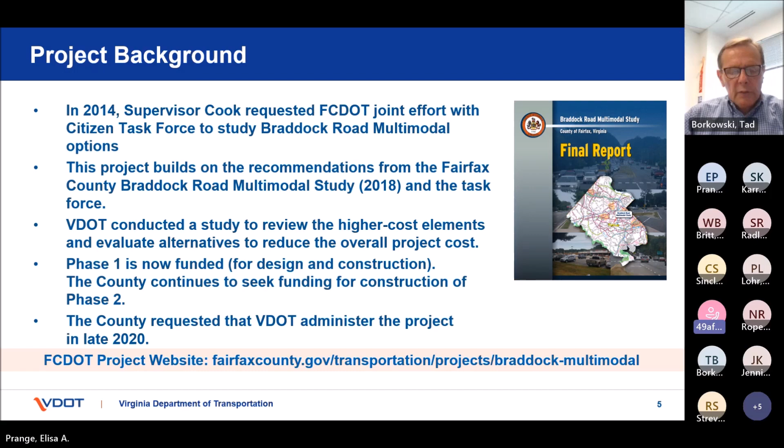After several unsuccessful attempts at securing funding, the project was split into two phases to increase chances of securing some funding to advance the project. In 2020, as part of a VDOT pilot project, proposed changes were included with the phase one Smart Scale application to reduce costs. Those proposed changes were presented to the community on August 3rd, 2020. Later in 2020, Fairfax County and VDOT coordinated on the best implementation approach, and VDOT agreed to take on development of the project on behalf of the county. In May 2021, as Andy said, this approach was successful and Smart Scale funding was awarded to phase one. The county continues to seek funding for phase two in partnership with VDOT. And now I would turn the presentation over to VDOT project manager, Calvin Britt.

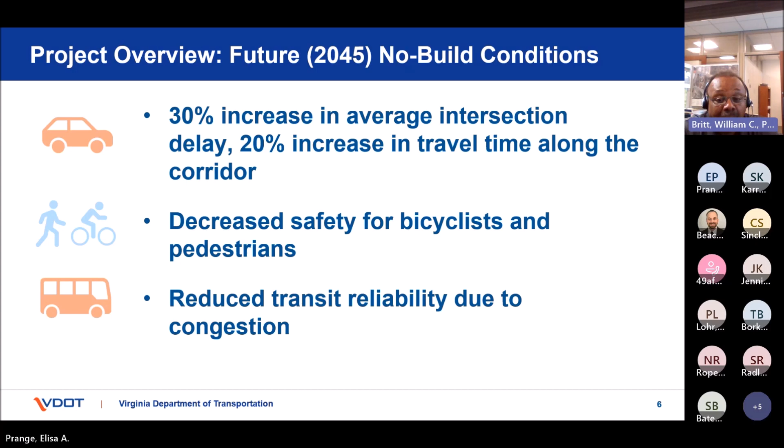Thank you, Tad. When looking at the future no-build conditions for the corridor in 2045, it is projected to have a 30% increase in average intersection delay and a 20% increase in travel times throughout the corridor when compared to the existing condition. This increased congestion may lead to decreased safety for pedestrians and cyclists, as well as reduced transit reliability without the project being constructed. Next slide, please.

VDOT is excited to be here to continue the development of the design for the Braddock Road Multimodal Improvement Project. Our work builds on the county work with a focus on implementing multimodal improvements along the Braddock Road corridor. VDOT has continued to collaborate with the county throughout the design process, and all the information, designs, and analysis that will be shared with you tonight were developed with these 5 overarching project goals. Number 1, improving connections and access on both sides of Braddock Road. 2, improving the comfort and safety of facilities for bicycles and pedestrians throughout the corridor. 3, improving transit accessibility. 4, maintaining and improving vehicle travel times throughout the corridor. And number 5, improving safety for vehicles by implementing access management at select intersections. Next slide, please.

Typical section between intersections. While there are design adjustments at specific locations, the project's typical cross-section includes a new bi-directional 10-foot shared use path, offset 10 feet from the edge of the travel lane with an 8-foot buffer between the shared use path and the face of curb, a 2-foot gutter pan on each side of Braddock Road, and the retention of the existing 3 vehicle lanes in each direction. This is in line with the recommendation resulting from the county study that Tad described.

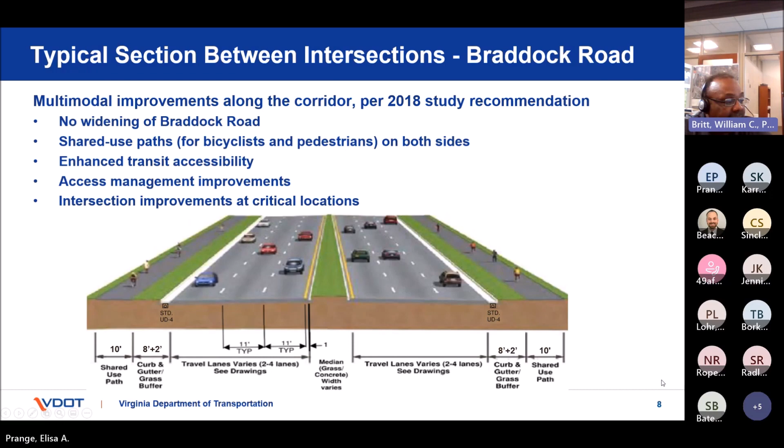Thanks, Calvin. One of the questions that has come up in multiple public forums is, why is a new shared use path needed in the sections where there is already a trail that runs parallel to Braddock Road? In response to this question, the project team reviewed the entire Braddock Road corridor to determine if there are portions of the existing trails that are viable to retain. Sections of the existing trail have significant challenges that make them unsuitable for use as a shared use path.

Some sections of the existing trail are set far back from the roadway and have limited visibility to the public, which may feel uncomfortable for some users. The proposed shared use path addresses key issues with the existing trails. The path will be 10 feet wide, which is ample for all users to comfortably pass one another. Grades will meet the ADA requirements by providing a facility that is usable by everyone, including those with disabilities.

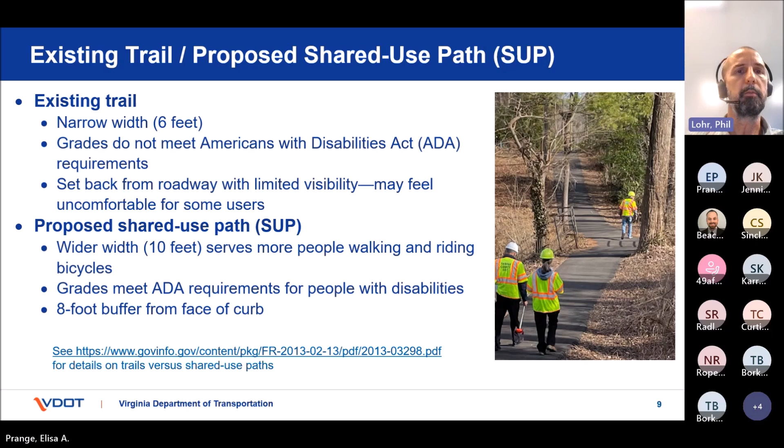So the results of our study are as follows. In the areas where the trail grades are under 5% and the trails are close to Braddock Road, it will be possible to widen or reconstruct them and incorporate them into the shared use paths. However, it will not be possible to preserve all the trees in those areas. These sections constitute approximately 27% of the existing trails.

Approximately 35% of the existing trails are considered to be offset too far, varying from 40 to 75 feet from Braddock Road, to function as shared use paths. The remaining 38% of the existing trails have grades that are too steep to be usable as shared use paths.

One of the topics we have explored in depth is how best to meet the project's stormwater management requirements. These requirements are described in the Code of Virginia, and compliance with the regulations is overseen by the Virginia Department of Environmental Quality.

The county, VDOT, and the design team have collaborated on a revised SWM strategy that consolidates many of the linear best management practices, or BMPs, that is, stormwater management treatment facilities, shown previously into 10 facilities in lieu of the 21 presented in the earlier design. Using fewer, albeit larger, facilities will meet the state regulations, preserve more trees, and not burden VDOT with expensive long-term maintenance obligations. This graphic illustrates one location where we were able to implement this strategy.

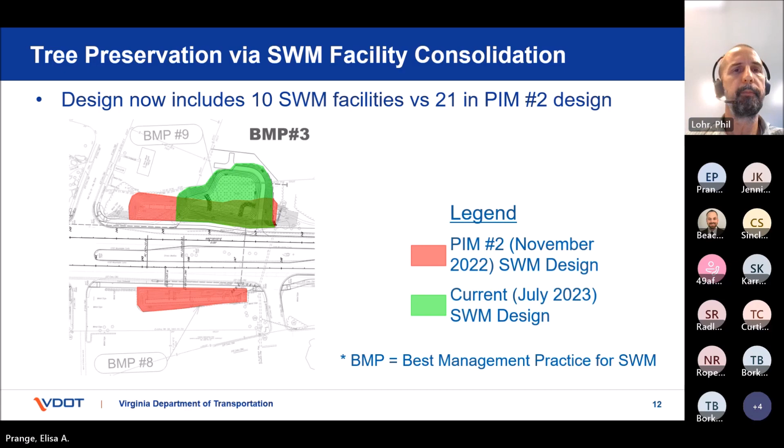The strategy we have explored is the use of retaining walls to preserve more trees, especially in residential areas, where approximately 75% of the walls are proposed. Some areas along Braddock Road require significant amounts of cut in order to construct the shared use path adjacent to the road, while in other areas the adjacent ground is lower than the road and requires substantial fill to accommodate the path.

Mechanically stabilized earth, abbreviated as MSE, retaining walls tend to be the lowest cost to construct. But the key feature of MSE walls are straps that extend behind the face of the wall to provide the structural integrity. This requires substantial excavation behind a cut section wall, and so MSE walls are not suitable here where the goal is to preserve trees. There are other construction methods that can be used to minimize the impacts behind a retaining wall. These include the following:

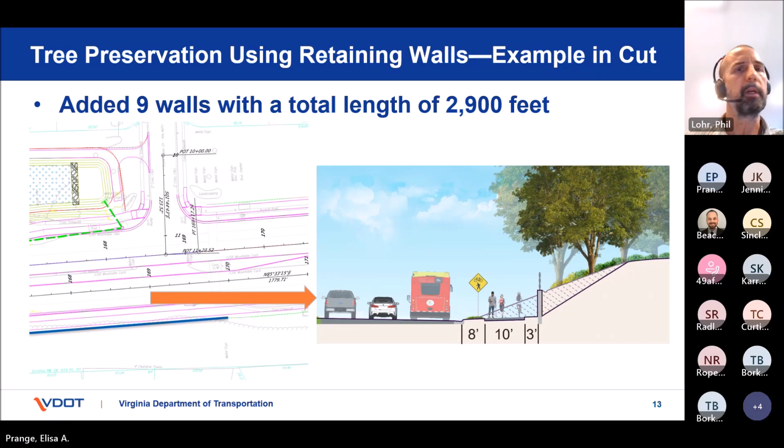This is an example of a location between Inverchapel Road and Queensberry Avenue where we have determined that adding a fill section retaining wall will help us preserve more trees. In this case, the wall will save approximately 20 feet of impacts going down the slope away from the road. Along the length of the corridor, we have identified 4 locations totaling 1,200 linear feet where it will be useful to include similar fill section retaining walls in order to preserve more trees. For the fill section walls, MSE walls may be viable, but again, the type of wall will be designed once the geotechnical investigation is complete. Slide, please.

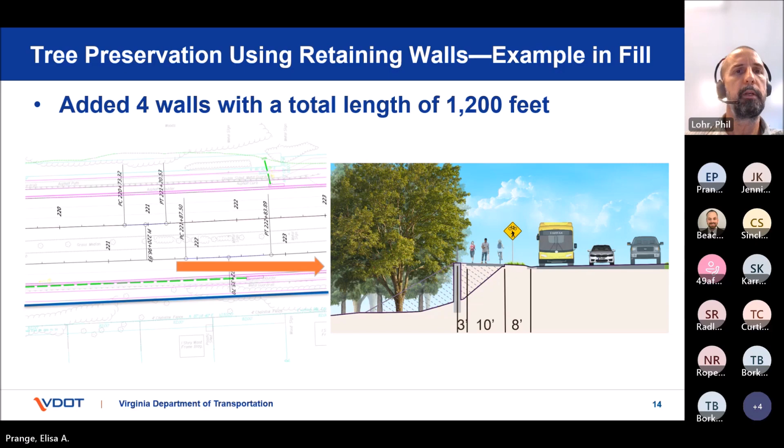So here we are showing the overall benefits accrued by consolidating stormwater management facilities and adding retaining walls. Within existing VDOT right-of-way, tree preservation is increased by almost 70%, that is, from 28 to 47%. Where right-of-way or easement acquisition is necessary, the additional property is almost entirely needed to accommodate project grading, which means that within the limits of disturbance, the percentage of tree removal is a little higher. But even from this perspective, tree preservation is improved by about 70%. That is, from 24 to 41%. The percentages shown here are for both phases of the project. The example at the bottom of the slide would be part of phase 1.

On the left, notice the large areas of red, that is, tree removal, driven largely by the linear stormwater management facilities shown in bright blue on both sides of Braddock Road. On the right, these particular SWM facilities have been consolidated elsewhere on the project, and retaining walls have been added on both sides of Braddock Road to maximize tree preservation, shown by the increase in green area. Slide, please.

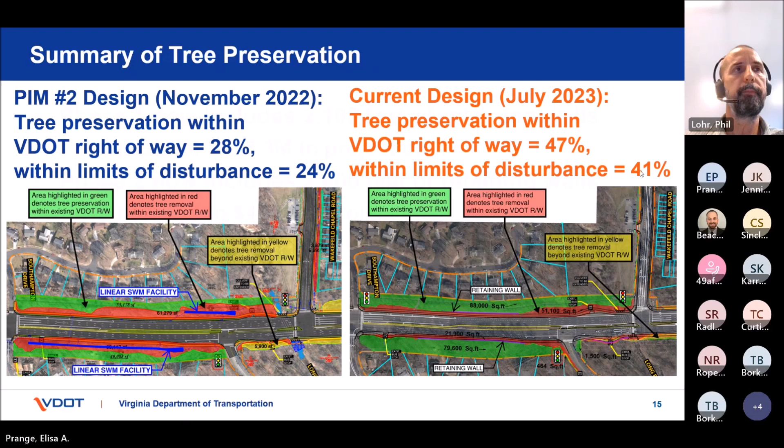Adding the retaining walls described on the preceding slides comes with a significant cost. Phase 1, east of Southampton Drive, includes 2,100 linear feet of walls with an estimated cost of $2.6 to $5.3 million. The substantial variation in cost is because the type of wall has not yet been determined. In order to preserve the maximum number of trees, more costly construction methods will be required at certain locations, likely including some of the wall types discussed earlier.

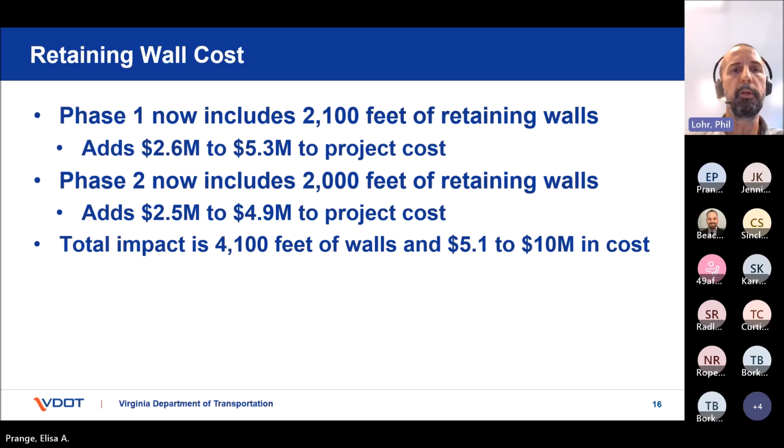Phase 2, west of Southampton Drive, includes 2,000 linear feet of walls with an estimated cost of $2.5 to $4.9 million. Thus, the total cost impact on the project is anticipated to be between $5.1 and $10 million. Slide, please.

Complex projects such as this one, every design decision carries multidisciplinary impacts. This SWM strategy presented during our previous public information meeting on November 29, 2022, relied primarily on linear facilities largely within existing VDOT right-of-way. However, 8 of the 21 facilities would have required more right-of-way acquisition, a total of 1.9 acres, and more removal of trees than the revised strategy.

The revised strategy presented at this time preserves more trees and requires fewer but larger stormwater management facilities, some of which require additional right-of-way acquisition. Proposed acquisition includes 0.1 acres from St. Stephen's United Methodist Church adjacent to Braddock Road, but without any impacts on the church's built infrastructure, 0.42 acres from Dunleigh Homeowners Association public space, but not from individual property owners, 0.21 acres from an undeveloped parcel between Red Fox Drive and Woodland Way, and 0.13 acres from the Catholic Diocese of Arlington, Virginia, that is, from Holy Spirit Catholic Church.

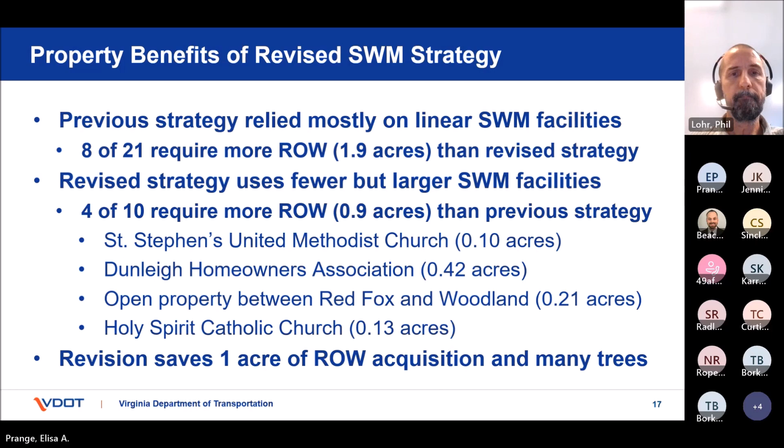Another design feature which we wanted to follow up on is the potential pedestrian bridge over Braddock Road just west of Burke Lake Road. We conducted a voluntary poll during our presentation as part of Public Information Meeting number 2 on November 29, 2022, the results of which split almost evenly between support for removing or retaining the bridge. We also gathered comments through the project website. If you have not yet had a chance to do so, we suggest that you visit the project website and specifically the public outreach summary for further details.

Based on the feedback we have received from the public and from our elected officials, the pedestrian bridge has been removed from the design. Please note that the current design does not have any features, such as stormwater management facilities, that would preclude construction of a pedestrian bridge at this location in the future should the need arise. We also anticipate that removal of this bridge from the project will offset the overall cost of adding the retaining walls described previously.

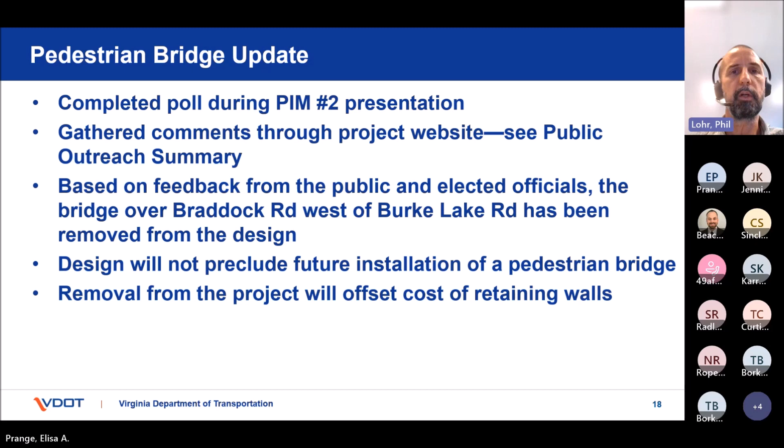We also want to share some recent updates to the project design along Ravensworth Road. Based on consultations with representatives of Ravensworth Baptist Church, and after additional traffic modeling, we have extended the southbound right turn lane by approximately 200 feet approaching Braddock Road. Modeling indicates that this will be sufficient to prevent the queue from backing up past Kalorama Road during peak hours. Note the section labeled AA just north of the Braddock Road intersection, that is just to the right. This will be discussed in more detail in just a minute.

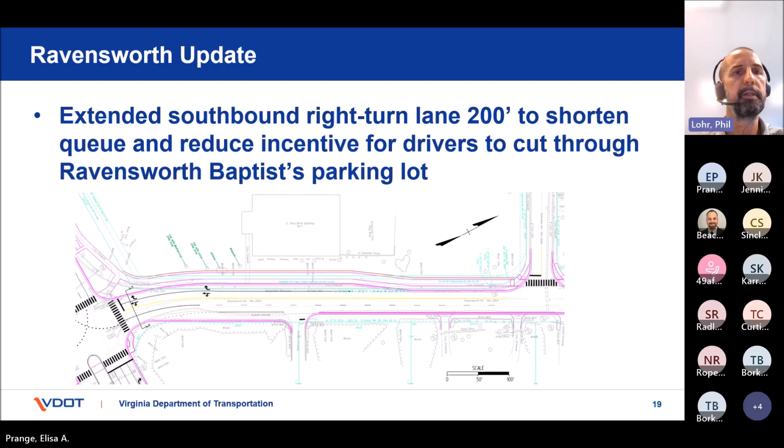In consultation with the county's active transportation staff, we have also revised the typical section along Ravensworth Road to extend the shared use path north from Ravensworth Baptist Church all the way to Heritage Drive. This is consistent with the county's comprehensive plan and will provide a contiguous facility from the path along Braddock Road. Bicycle traffic will be shifted from the on-street bike lanes onto the path up to Heritage Drive. A 7-foot wide buffer strip will also be provided between the back of curb and the inside edge of the shared use path. Utility poles will be placed within this buffer strip, eliminating the need for an additional easement outside of VDOT's right-of-way.

From Kalorama Road north to Heritage Drive, this typical section can be accommodated entirely within existing VDOT right-of-way. The 4-lane section illustrated here will be provided only from Braddock Road up to the beginning of the southbound right turn lane. North of Kalorama Road, the 2 northbound lanes will merge into one, and then a left turn lane will be developed for Heritage Drive. North of Heritage Drive, the roadway will transition back to the existing section with 1 vehicular lane and 1 bicycle lane in each direction.

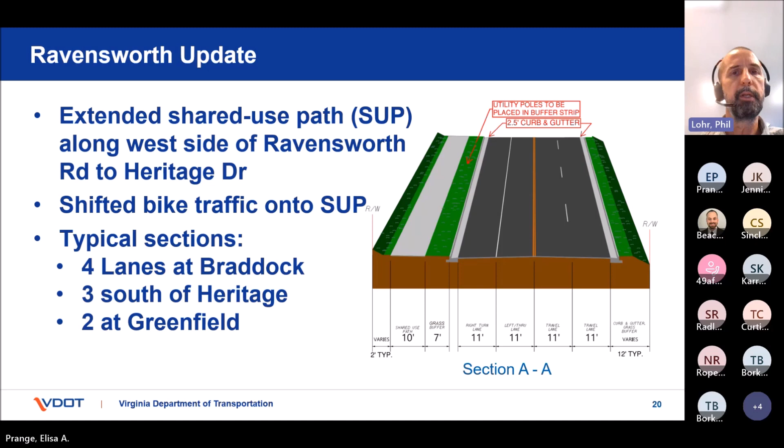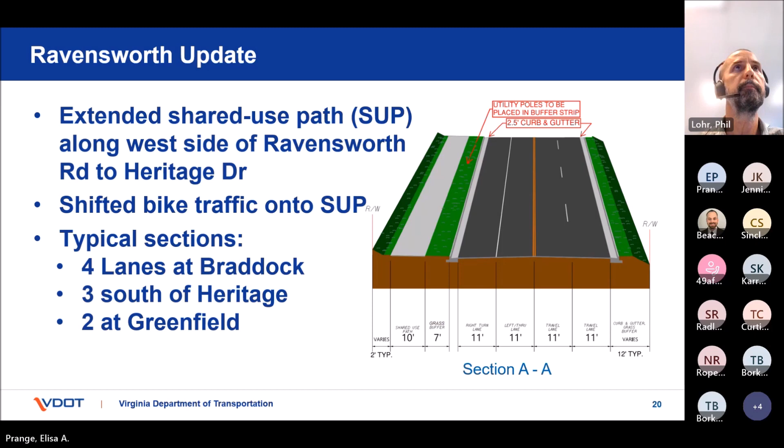I'll turn the presentation over to my colleague, Suresh Karre, to go over some details on how we evaluated the various options in order to arrive at the preferred option. Thank you, Phil.

During our second public information meeting held on November 29, 2022, we discussed public input survey results, the evaluation scoring summary for different options, and a staff recommended option for each of the 3 critical intersections shown on this graphic. During and after the meeting, we received multiple questions regarding additional details on the evaluation methodology and the details involved in the evaluation scoring. To address these questions and provide a better explanation of the evaluation methodology, the project team prepared a comprehensive Braddock Road Multimodal Improvements Frequently Asked Questions with responses. These FAQs have been posted to the project website.

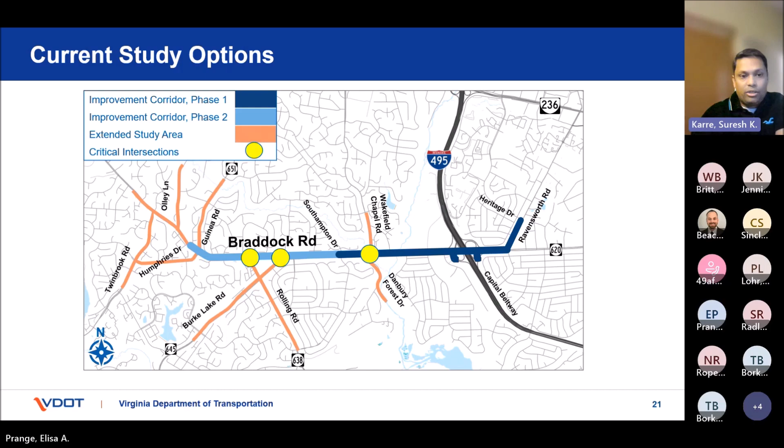This evening, I would like to walk you through our evaluation methodology along with a specific example of one of the critical intersections. As you may recall, the original Fairfax County study included a comprehensive evaluation of multiple improvement alternatives for Braddock Road and compared those alternatives based on specific measures of effectiveness, called MOEs, and scoring. Those MOEs and scoring were developed based on extensive coordination and input from the Citizen Advisory Group, also known as the Task Force, consisting of a number of community members and representatives.

For the current project, we used the same evaluation methodology as a guide and made additional refinements to address the need for intersection-specific evaluations. We used 6 evaluation criteria, with most of the criteria having several MOEs within them. Each criterion was assigned a relative weight, with the weights of all criteria combined adding up to 100. Next slide, please.

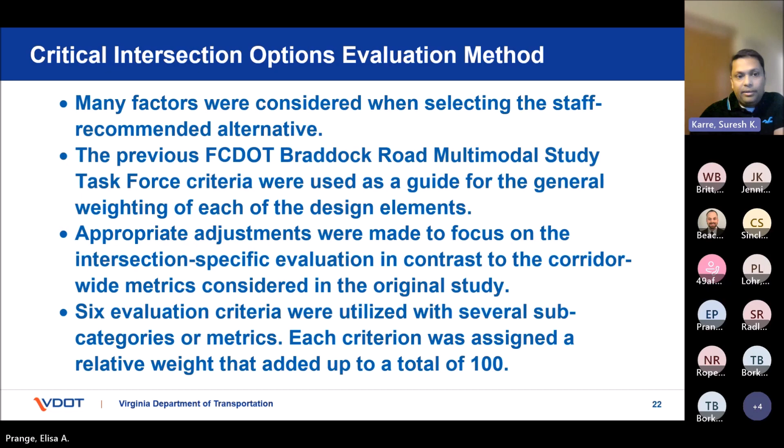Here we have the specific evaluation criteria along with the relative weights and the various associated MOEs. Consistent with the original study methodology, multimodal safety received the highest weight. One of the refinements we have incorporated into this evaluation methodology is to explicitly add a category to capture community impacts, which included the community survey of the proposed options.

Each of the MOEs, such as intersection delay, travel times, area of impacted land, etc., were evaluated on a simple rating scale ranging from -2 to +2. No build conditions were considered to be the baseline and were assigned a score of 0. Therefore, an option that performed best compared to the no build condition received the highest score of +2, and the worst performing option received a score of -2.

The various MOE ratings under each criterion were then averaged and multiplied by the weighting factor to establish the score for that criterion. Scores of all evaluation criteria were then aggregated to derive the total score of the option. I understand it may sound complex, but I will walk you through this methodology using one of our critical intersections as an example to provide you with a better sense of how this is a comprehensive evaluation that accounts for each of the evaluation criteria. Next slide, please.

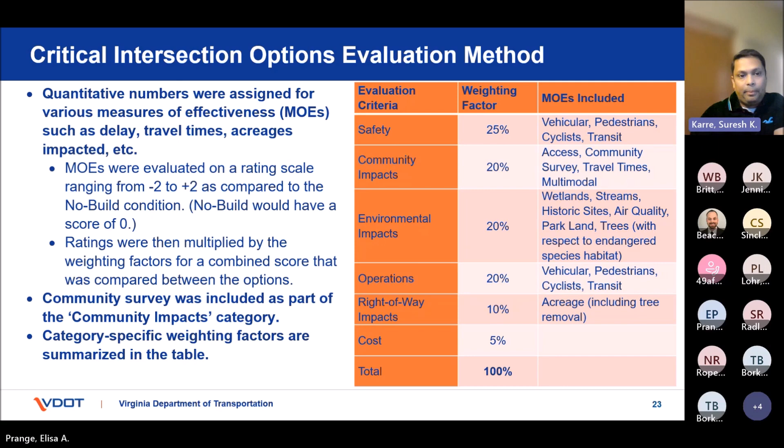During our November 29, 2022 public information meeting, we shared the final score for each of the options and identified the base option as the staff recommended option based on the highest score. On the left is an expanded table showing the individual scoring of each of the 6 evaluation criteria and their corresponding scores. As you can see from this table, operations, right-of-way, and environmental impacts elevated the base option.

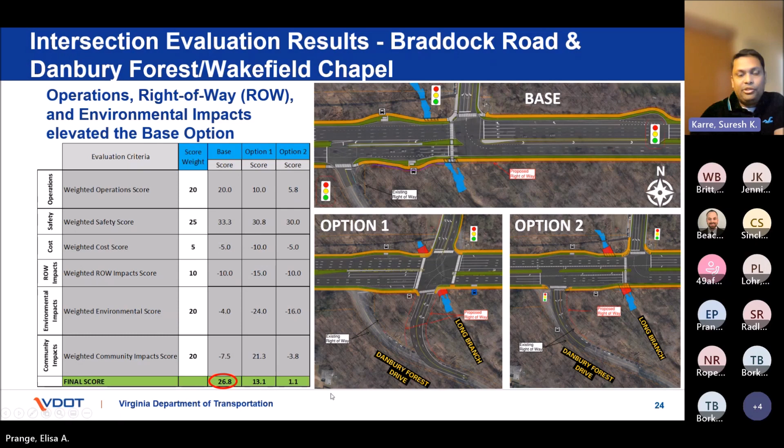Thank you, Suresh. Anticipated project costs, funding, and schedule. As we have previously discussed, the project has been divided into 2 phases. Phase 1 is the eastern portion from Southampton Drive to Ravensworth and up Ravensworth to Heritage Drive. It is funded through construction based on the previous design concept as presented during PIM number 2. Adding the retaining walls in phase 1 is likely to create a funding deficit. Phase 2 is the western portion from Humphries Drive to Southampton Drive and is not funded beyond design approval at this time.

In terms of schedule, our project team will continue to advance the design through approximately the fall of 2023, with a design public hearing including 40% design plans anticipated by late 2023. After design approval, phase 1 will move forward with final design, right-of-way acquisition, utility relocation, and construction. Note that VDOT has begun an early assessment of potential utility relocation and utility easement needs, but this activity will proceed in earnest only after design approval.

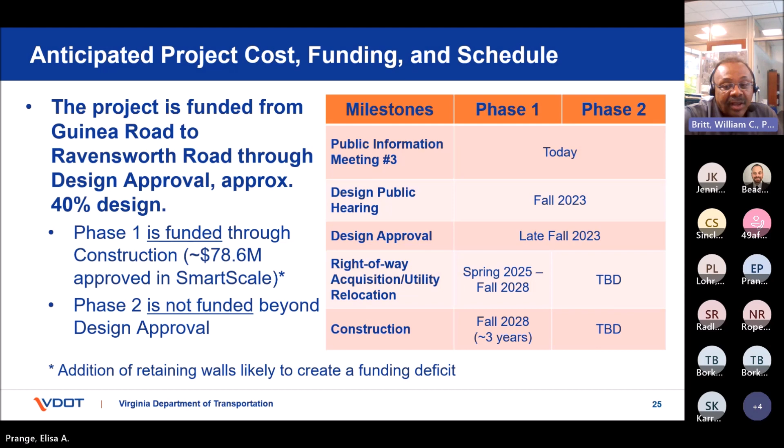At this time, phase 1 acquisition is anticipated to begin in the spring of 2025 and construction of phase 1 in the fall of 2028, and is projected to take approximately 3 years. VDOT will strive to identify and take advantage of any opportunities to accelerate right-of-way acquisition, utility relocation, and the construction of the project. Next slide, please.

As you can see on the screen, there are multiple ways you can provide us feedback for this meeting. Please submit your comments by August 7th. Next slide, please.